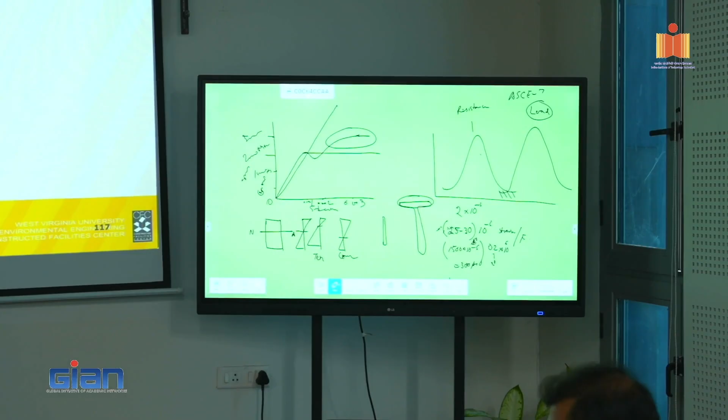Sometimes, I told you, nobody asked me a question and I'm glad you didn't. I said I built a jointless bridge - remember, my McKinleyville bridge? That's going to expand and contract, right? And that's going to crack, and it did crack, for example, due to whatever reasons.

So what we do in the US is, we let a bridge crack, then clean the crack and grout it - high pressure grout, no doubt, not the kind of housing grout you have that peels off, no. And what did you do? You have created an excellent kind of pseudo joint. Yes, sir, you see?

One administrator in the US built all the buildings but didn't put any pavement. So everybody was worried, what's wrong with this guy? You know what he did? He waited two years, watched how the students were walking, what direction, and figured out where the grass was beaten up, and that's where he put the pavement.

So likewise, we are finding a jointless bridge, letting it crack, finding exactly where it is cracking, opening that up a little, cleaning it up, and putting a high strength grout. The grout has a certain ductility to it, therefore it doesn't open up.

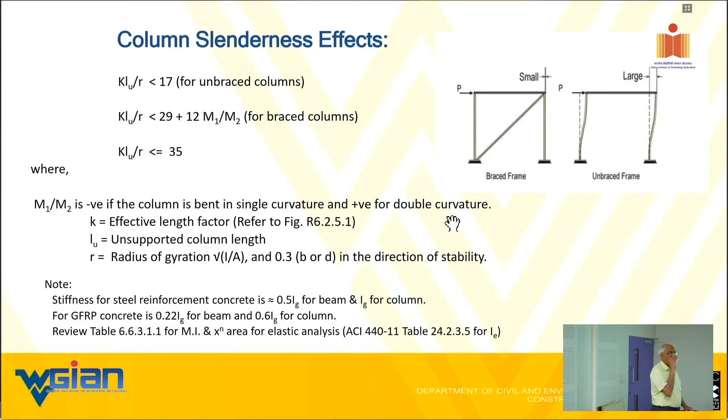Anything else? Currently, we are doing the application. Simultaneously, the analysis is being done too. And I always like to tell people, a code is a dynamic system. It is an evolving system. This is not a perfect system.

We're trying to improve it based on our understanding, based on our experience, based on the failures. As some wag said, you learn a lot more from failures than from successes, because in successes all the failures are buried in. Whereas with a failure, you want to analyze that, and that's why the concrete guys never ever allow you to use any kind of equation in a brash manner without adequate testing.

Because they know you are dealing with a cracked section, not an uncracked section. Now, I can give you a reason, Mr. Sharma - your name is Sharma, you said? I can almost come up with this number. You know that? How? A cracked section with 0.1 inch depth, and you multiply that by 1/3 BD cube plus AD square, you got an answer. See how clever they are? You understand what I said? That's how they came up with it.

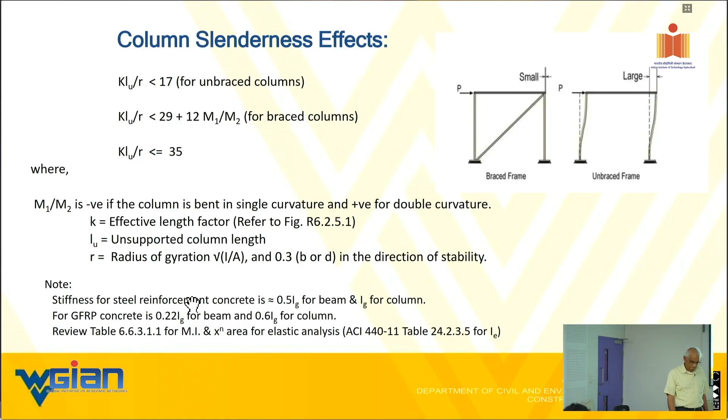Analysis or design, any one of them, always have certain assumptions. Would you mind going to the one slide before? So, okay, these are the assumptions. Again, I'm coming from the US code point of view. So I need to properly explain what is 0.003, what is this, especially this one, and what is this. I'm coming from the US code point of view, so you have to bear with me.

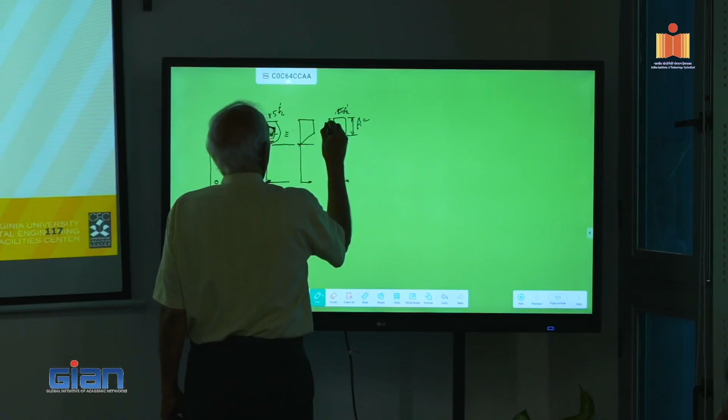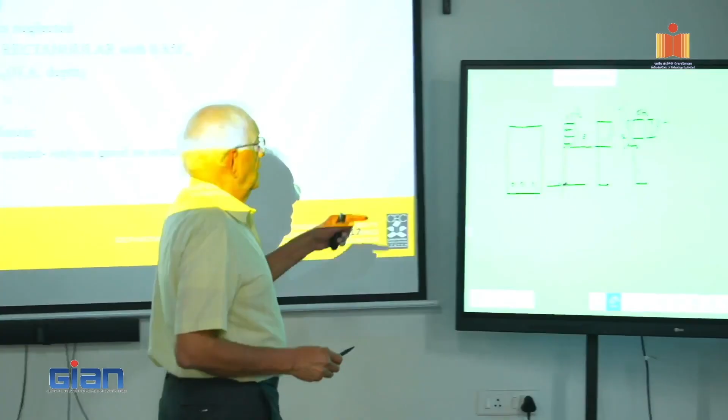Okay, now I'm talking about the US code. There are three different kinds of stress blocks that we use in the US. This is a parabolic stress block, also known as Hognestad's stress block. This is a trapezoidal one, known as Jensen's stress block.

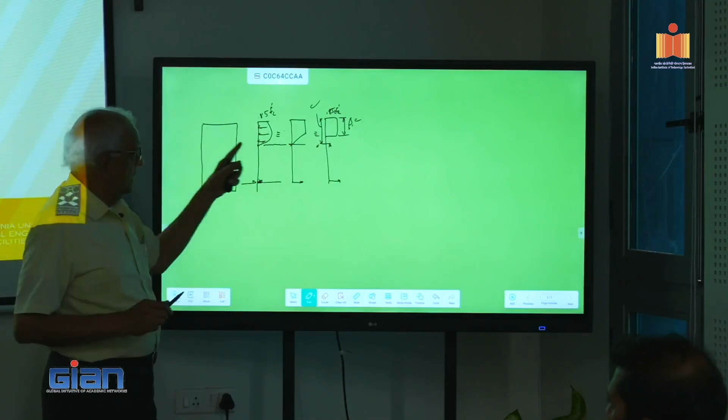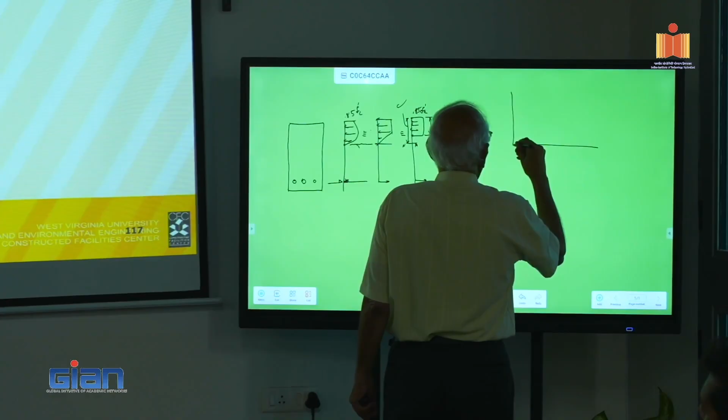This is Whitney's approximate stress block, corresponding to that of Hognestad's stress block. You know how we got this? That is essentially nothing but the stress-strain curve of concrete. So if you look at the stress-strain curve of concrete, that is stress versus strain. So on the strain axis, you flip it, that's what you're going to get.

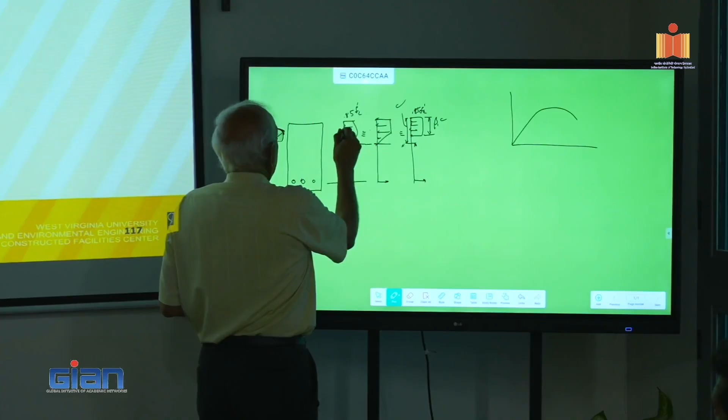Now, that's a very difficult stress block to mathematically handle when you are dealing with it as an equilibrium equation, right? So, of course, the resultant of it is somewhere there. That should be equal to this, right? Otherwise, it's not in equilibrium and all that good stuff. And Jensen came along and since it is too complicated, he did this. And then Whitney said, no, no, no, it's even more complicated, and he did this, which is wonderful, easy to deal with, right?

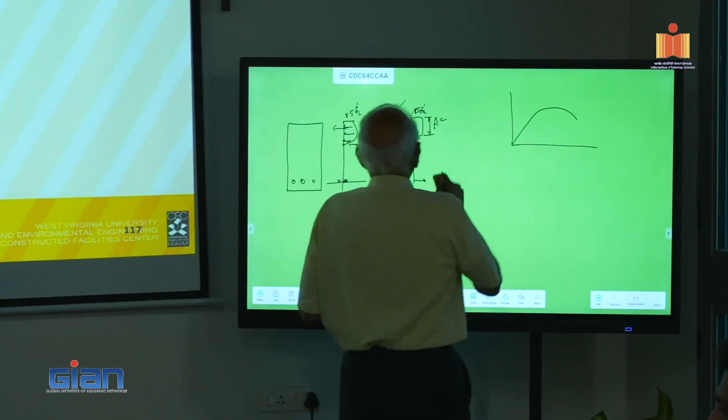So the force from this stress block is what? The force is B times C, where B is the width. We call it A - let's call it A. That is, if you look at the 3-dimensional view, this is the area. And you multiply that with F prime C. That will give you the compression force, which should be equal to As, Fs, or F1.

I'm going to leave it as Fs only because I'm going to make you understand what is a compression failure. I got some questions - I was a bit surprised, there is a misunderstanding about it. Therefore, I'm taking a little bit of time to explain it. Okay, now you understand how this is transmitted in this fashion. This is a simplification of this, and this is a simplification of that. So that is the force part of it.

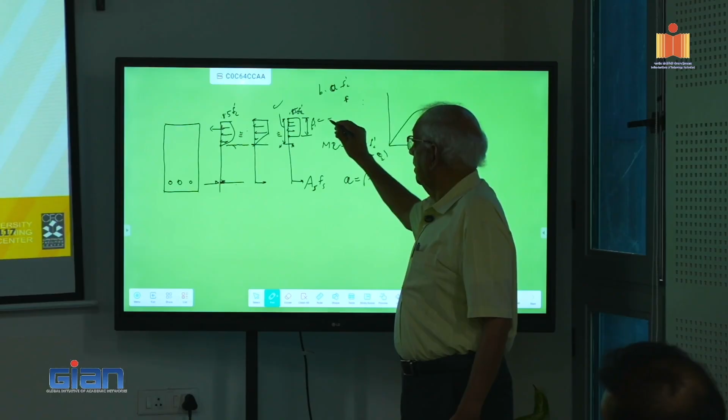What is the moment part of it? Moment resistance is that force times the distance from the neutral axis, which is d minus a over 2. So the a value is beta 1 times c. You see that beta 1c? So what is beta 1c?

This is American code, so I'm not familiar with your code, but they're all about the same - equilibrium cannot be different, right? So what is beta 1c? I'm teaching the American code. Up to 4,000 psi, beta 1 is 0.85. Up to 4,000.

Above 8,000 psi, beta 1 is 0.65. When you go from 4,000 to 5,000 psi, beta 1 is 0.85 for F prime C of 4,000 psi concrete, which is approximately 25 MPa, maybe a bit more, 27 to be exact. Beta 1 is 0.8 when F prime C is 5,000. That is the simplification made by the American code. That number is 0.75 for F prime C of 6,000, 0.7 for 7,000, 0.65 for 8,000, and it stays there or greater.

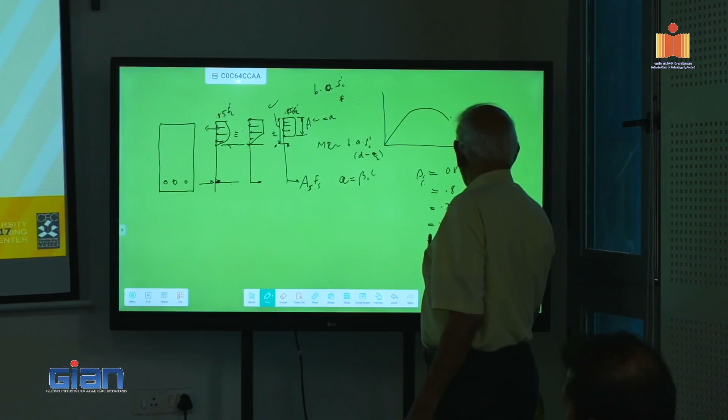So that is the definition of this beta. Again, after testing literally hundreds of cylinders, we deal with cylinder strength, not cube strength. You all deal with cube strength. So please note, I should have emphasized it up front.

So now you know what beta is. It's extremely simple. Your moment resistance is B times A, that is the compression block area, times the corresponding strength, and D minus A over 2. Oh, I goofed up, sorry, I should have added 0.85 here. So that is an approximation, but it works wonderfully well.

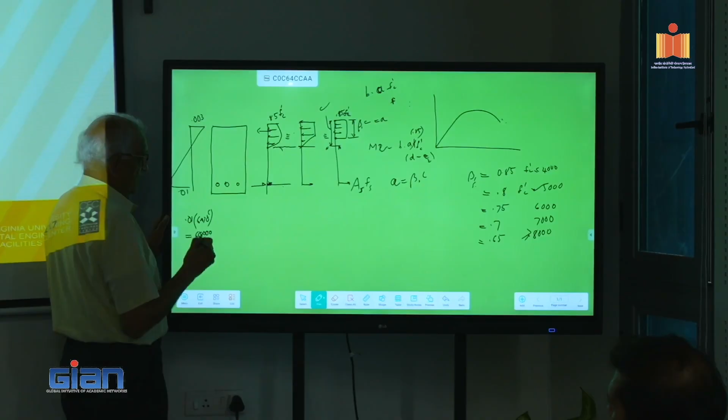That comes from the 60 KSI business. Somebody thought, meaning 0.01 is the strain, and the E value of the composite is approximately 6 times 10 to the power 6. So 0.01 times 6 times 10 to the power 6 is 60,000 psi or 60 KSI. That's where there is no rhyme or rhythm for arriving at that.

In my notes, you will see in the next slide or two, I certainly question this. But I'm not going to go there, my questioning doesn't make any difference, you have to follow the code. Why do I question that?

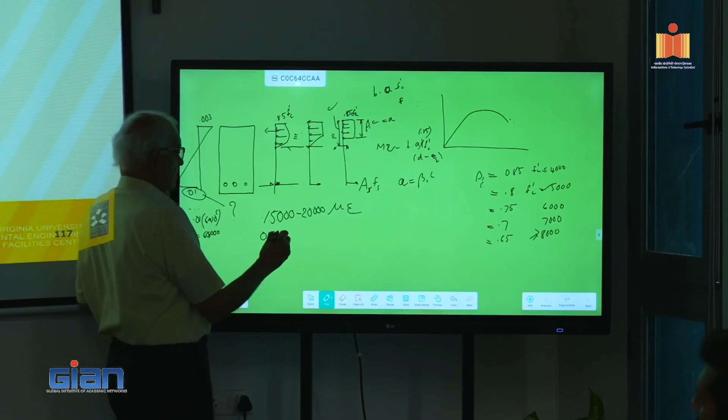Think about it. If you remember, I said typically I tested 500 to 1,000 bars in that range with your vinyl ester type thing. Typically, we are getting about 15,000 to 20,000 micro strains to failure. So if I convert that, multiplying with 10 to the power minus 6, that's what you get, or it's more, I was getting in this range.

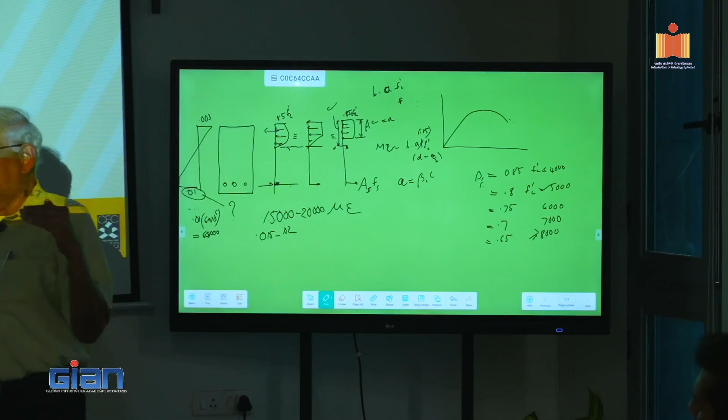So they have reduced it by a factor of 2. Don't ask me why they reduced it. My feeling is, I was not there to understand it, but my feeling is they put it at 0.01 because that corresponds to your 60 KSI steel. I think that's what they did. Somebody was asking me the question, where did you get 0.01? You know, that's what it is.

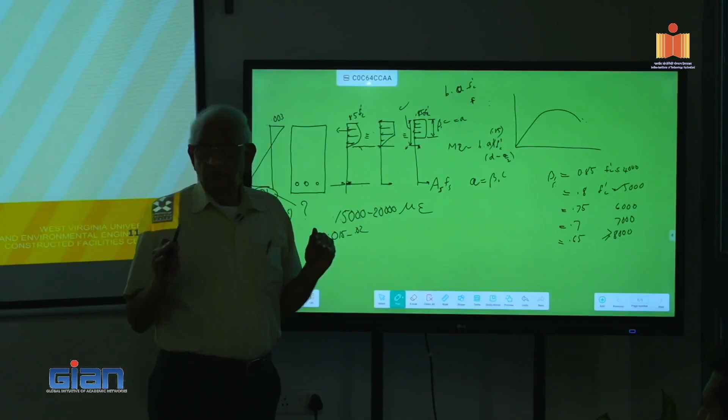Okay, now, if it is a balanced failure, most of you know that we are talking about concrete reaching 0.03 while at the same time FRP at 0.01. That's an imaginary idealistic framework, whereas it may not be true.

If I want concrete to first reach 0.03 or 0.035 - you people use that, the Germans have 0.04 - if you want concrete to reach that number before FRP reaches its number, that implies a compression failure mode under bending loads. We have to be very clear, because somebody asked me a question and I was a bit aghast, oh gee, I didn't explain it right. So in such an event, when will you get that? Only when the neutral axis is below the balanced value. And conversely, if I want a tension failure, it goes up, and you know the rest of the story.

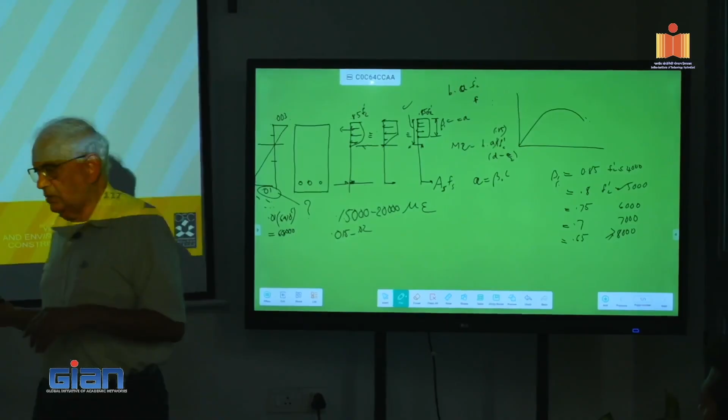Now, why did we pick compression failure mode as a preferable failure mode? We never said you should not use a tension failure mode, nobody said that. Between the two, we prefer a compression failure mode. Why? Because when we look at it, the energy absorbed under compression failure mode for FRP reinforcement is higher than the energy absorbed under tension failure mode. That is the crux of the issue.

In steel, we have a preferential failure mode as tension failure, not compression failure. There was a tremendous resistance to accept compression failure mode with GFRP because of that mindset. Then we have to show here that the energy absorptions and deformability ratios are superior compared to tension failure. It's all a relative statement. It may not be as good as that of steel, but you still have a good amount of warning. Why are we using this? Because we need adequate warning to prevent catastrophic failure.

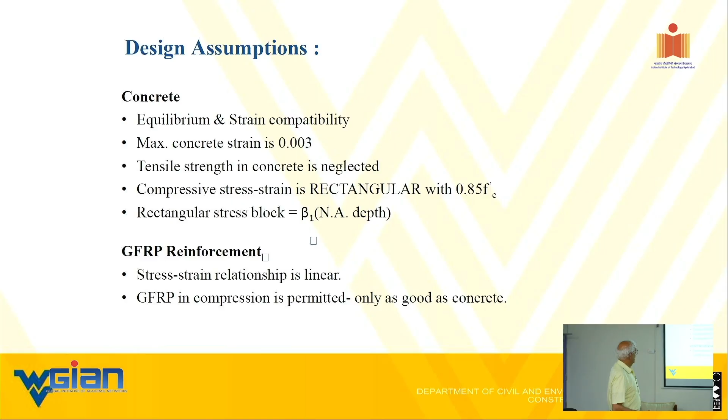Okay, now I will go. Did I skip anything? Okay, no, I didn't skip anything there. So I already gave you this - the compression failure mode. You look at that. What is that? Area times FFU.

That's the lower bound. That is the balanced value. The balance is established based on your compatibility relationship - it doesn't show on that screen. Compatibility relationship - where did you get this thing? That thing comes from here.

So with that, I talked about the beta 1 issue already, and this is the complex curve that is idealized as this, and that is the balanced failure. What did I say? I said the balanced failure definition is 0.01 - I wrote it there, right? Okay, now I further stated here, beta 1 is 0.85 up to 4,000 psi, decreases by 0.05 - I wrote it down there too.

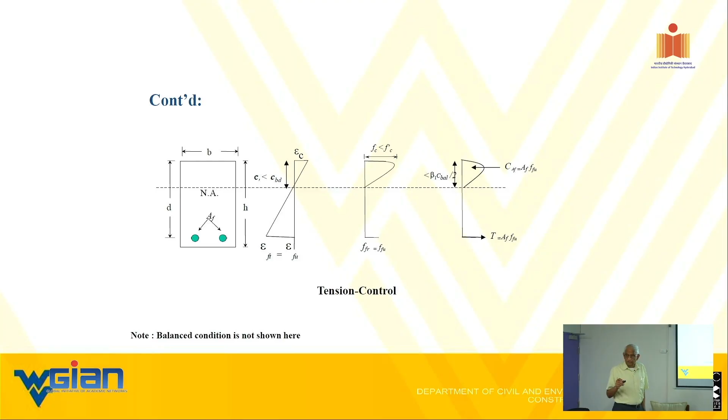All right, now I'm explaining it because our code is slightly different. Like he said, it all washes out to the same thing with a few percentage points this way or that way. That is tension failure. I already told you that the neutral axis is going to be shifting up smaller than the balanced value. That is the tension failure.

What is a dowel action? What is a dowel action, do you know? It is a shear transfer by the composite. They neglect the dowel action, shear transfer, even by steel, forget about the composite. In other words, they do not account for the dowel action. It's a friction.

Actually, it is the shear of dowel bar. Somebody was asking me about the dowel bars. So there's a shear force transfer, and we are not accounting for that kind of thing when it comes to composites. Even in steel, we measured it. Some of the dowel actions increase the strength of the material by about 15%. But we are not accounting for those kinds of things in real mass designs. We may do that for research purposes, but not for design purposes. So first of all, I want you to understand the dowel action, shear transfer.

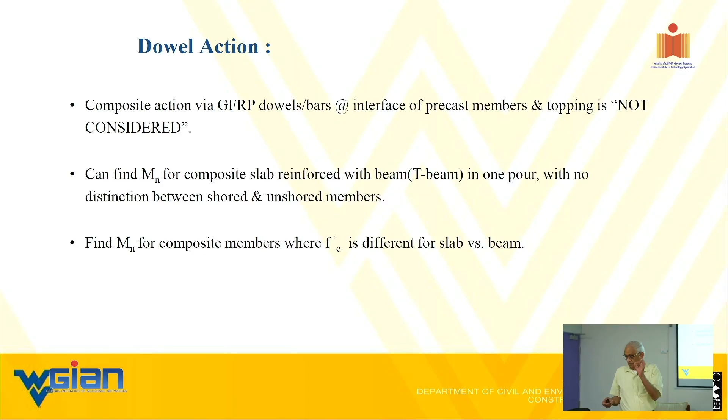Now you can find Mn as a nominal value. What is a nominal value? That is before you multiply with the reduction resistance factors. That's called a norm. If you multiply with a phi factor, that becomes your M sub u.

Axial and combined axial flexural strength. Here, if the axial load that you are applying, what's P sub U? P sub U is from the induced loads, but most importantly, multiplied with appropriate load factors. So you need to understand and clearly differentiate this, or else you can be mixed up.

If P sub U is greater than 0.1 F prime C A G, then stresses in GFRP are limited to 0.01. In other words, that is the combined axial bending effect. If P sub U is less than that, for all purposes, you say it has no bending effect. That's again an approximation. Only after the axial load effects are higher than 10% of the ability of the concrete to take the full capacity load under compression, then only.

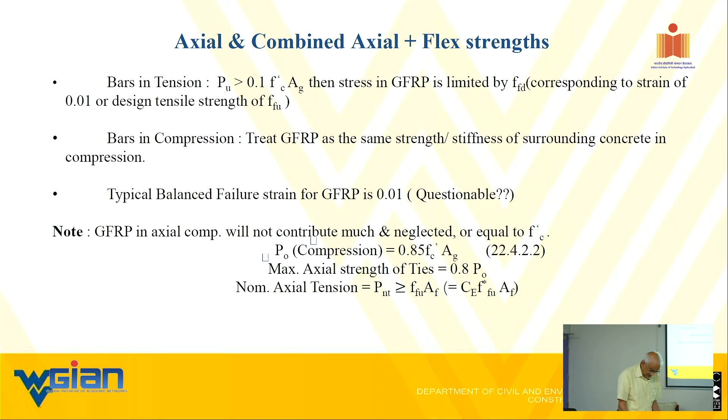Okay, we neglected the dowel action. Now, again, these are all rule based, right? So what is that telling us? The closed loop ties have a clear spacing of 4/3 of the size of the aggregate. Typically we use 3/4 inch aggregate, but that's not the only one. We also use 1 inch aggregate size, maybe 1 1/4 inch, depending on the size of the concrete, a beam or a column. But the message is...

That is one. The second thing is center to center spacing of the ties is 12 times the diameter of the longitudinal bar, or 24 times the diameter of the tie or the stirrup. We use the smallest of the dimensions.

Minimum bar diameter - in the US, we don't have a number 2, meaning a 1/4 inch size bar. We don't have it. I don't know if you have it anymore. So we typically use a 3/8 inch bar. That is 3/8 inches, which is 9 millimeters, right?

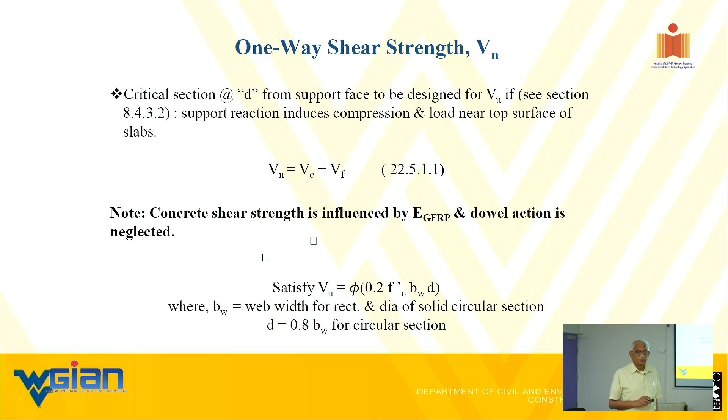Now let's look at the concrete. I don't even know, honestly, me talking, not the code. They have two equations there. They're saying greater than 5 times lambda S KCR square root of F prime C BWD. So BWD is the area, right? Yes, we know that. So 2 times, typically 2.5 times square root of F prime C is what the concrete shear contribution.

But what I didn't quite understand is, we can talk about the lambda S. For a minute, let's assume lambda S is equal to 1 for discussion purpose. So what is the first equation versus second equation? That is 5 times KCR times the rest versus 0.8. That's essentially the difference between the two. Am I right? Yes, okay good.

KCR, I don't know how many of you, do you remember how to get that KCR at all? You don't remember. What is KCR? KCR is what is the depth of the compression block at failure. You know, that is the key. That's what we are talking. And like I told you many times, it is hovering around 0.1, 0.12 in that general range.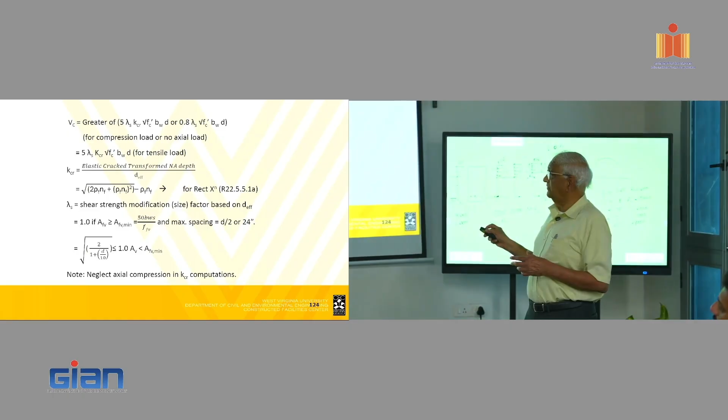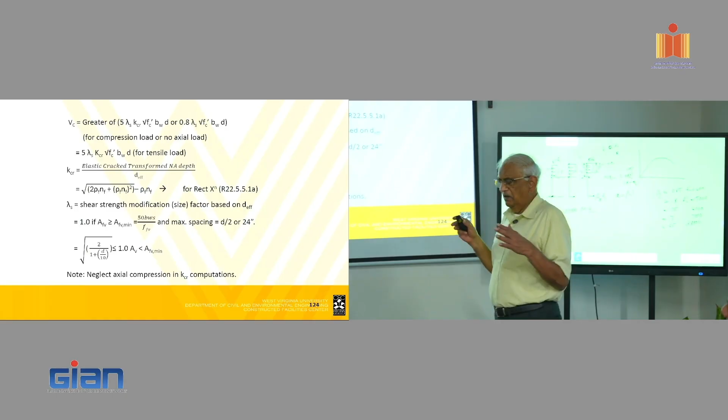So if I really multiply 5 times 0.12, I get 0.6, right? And with all the approximations, why they wanted to sound like a super sophistication with that equation, I have no idea. Number one, I can derive that equation in no time. But number two, this value is so small compared to that value. I don't even know why they have included this term under the square root. I have no idea, but that contribution of this second term is totally negligible.

Shear strength modification size factor. You know what a size factor is? You don't, okay. Timoshenko shear, if you look at it, size factor is a ratio, is a value based on the ratio B over D. If B over D is nearly square, it is about 1/3, nearly square, plus or minus. But if that increases, 1/2, 1/4, it may come down to 0.25, 0.2. That's the kind of a size factor.

But typically, in any design, maybe I should have started with that. When you design or want to design a beam based on steel under bending, where do you start? L over D ratio, L is the span length, D is the depth. Where do you start? The number is around 17, 18, 19. L over D should be 17, 18, in that range, right? In FRP, that number is 12, 13. In that range, somebody say 11, somebody say 13, but give or take, that's what that is.

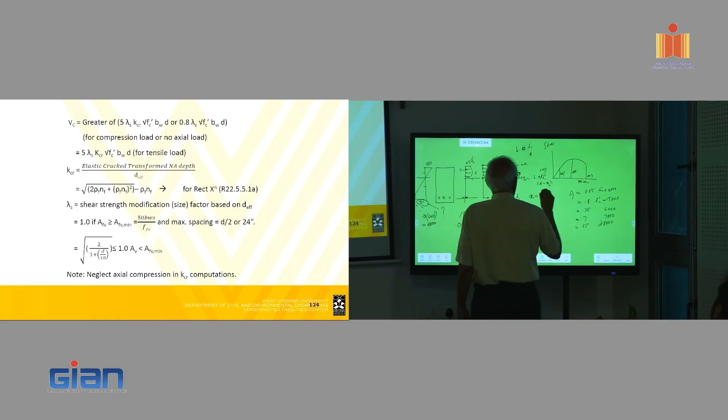And you know what? In this is the stress, right, of concrete cylinder or block. This is strain, right? This number is 0.003, we said that, right? This number, strain is 0.002. This number, 0.001. You know what 0.001 is? Up to that point, which is approximately 45% of F prime C, up to that number, we are saying that the stress versus strain in concrete is linear. That's what that number, that magic number 0.001, that's what we are talking about.

Okay, anyway, all right. So if I use the strain compatibility, if I use the equilibrium equation, if I use the force deformation relation, which is the Hooke's law, if I use all three and make it into one equation, that's what you're going to get. I'll be happy to derive it. Let's not waste time on that. Any rudimentary sophomoric textbook has it. That's what you're going to get.

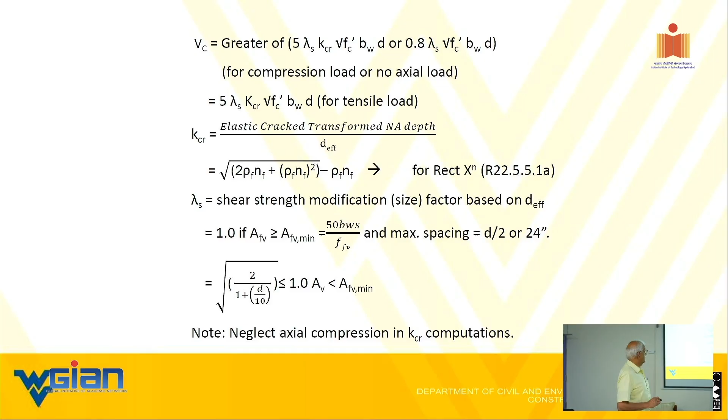One-way shear reinforcement - what is a one-way slab and a two-way slab? The aspect ratio is less than 2 to higher than 0.5 between them. It's a plate action, the del 4 equations and so on. Some people use 2.2, 2.4 for the one-way slab. Above that is a one-way slab, below 2.2, 2.5 is a two-way slab.

So what's the difference between the one-way slab and two-way slab? The two-way slab is stiffer than the one-way slab - that's essentially what it is. The two-way slab has two-way bending. The one-way slab is like a cylindrical bending, which we call one-way bending. We only put reinforcement in the other direction as a rule, based on some kind of As minimum for temperature and shrinkage. All right, that's the difference.

So we are talking here about a one-way slab, not a two-way slab. Yeah, shear - here, if you look at it, talking about slabs...

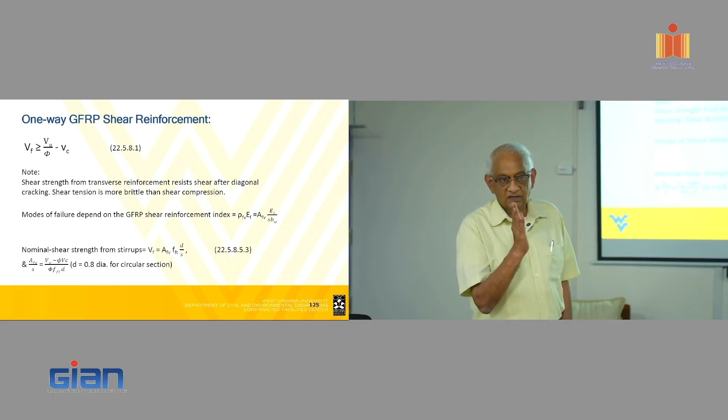What that is - of a stirrup? That is the area of the stirrup, that is the strength of the stirrup, which essentially gives you how many stirrups you have in a given depth, because the shear crack is assumed to be 45 degrees. That's how you get that - the number of stirrups, d over s, is the number of stirrups that are cut by a 45-degree angle of the shear crack.

Okay, so from all that you are going to get, by substituting all this here, the equation you're going to get, and I can define all this. So what am I doing here? What is my spacing, right? So I'm going to pick a number 3 diameter bar or a 4 diameter bar, therefore I know the value of the area of that bar, right?

So here is the shear force including the load factors. Here is shear resisted by concrete including the resistance reduction factor, and this is what that amounts to. So that will give you the spacing of the stirrups. From this equation, I know everything except this, so I find the spacing. Okay.

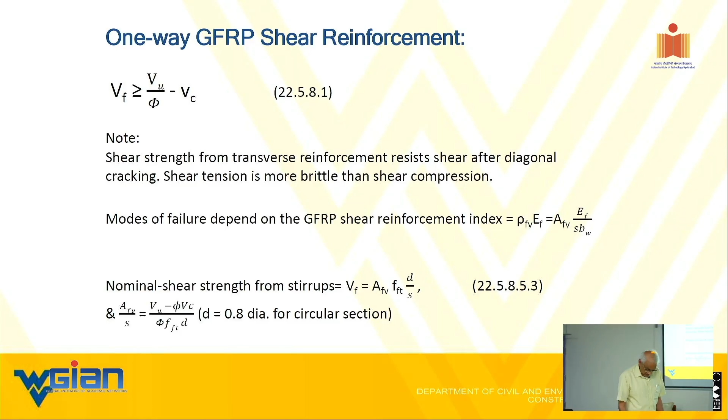It is the section in which the column is trying to punch through, at a distance d by 2, or d, from the face of the column all around. That is called a critical section.

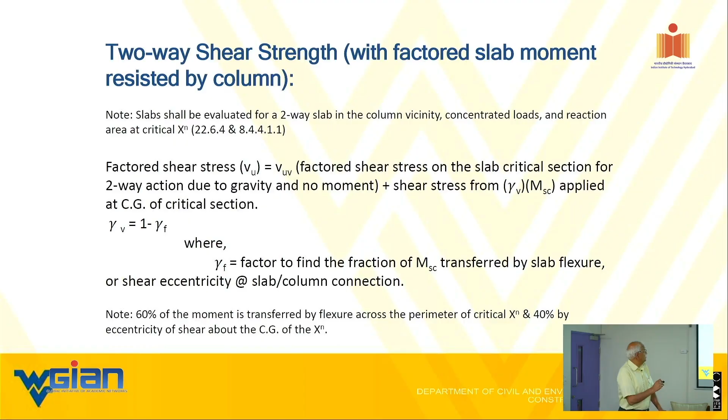This is the equation. I provided the section numbers but not the equation numbers from the code; if you open the code, you will find the equation numbers. These equations are essentially the same as those in the ACI 318 code. And please don't forget, the mechanics part didn't change, only the materials part changed, so that is one thing you need to keep track of.

We're back to our same philosophy: phi is the reduction factor for the material, and S is the strength. We in the US call stress as strength, don't ask me why, I don't know where that word came from, but what it means is essentially the stress.

U is coming from the factored load combinations, so phi times Mn is like Mu, where Mu is the load-combination-based moment capacity. You will understand all this when I run an example very quickly.

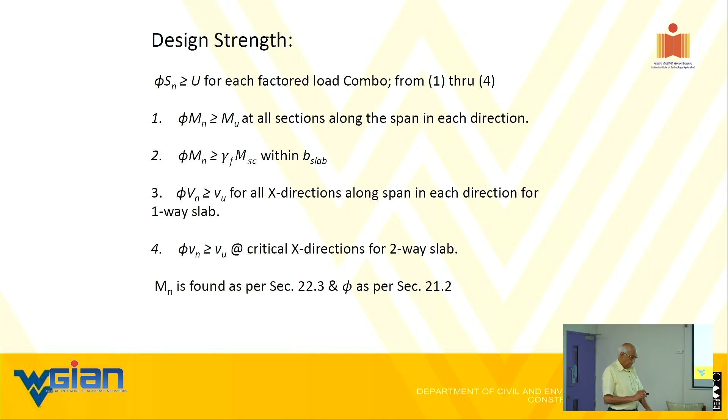Slab design shear near columns, concentrated loads — remember I told you the plane sections do not remain plane, and they gave you guidance for where you have an opening, or a drop panel, a discontinuous function.

That is where all these section numbers I gave you come in. As I said, chapter 8 talks in generalities, while the specifics are in these other chapters. Please look: it's permitted if the analysis shows strength and service limit states are satisfied. This is quite a task, you need a lot of patience to crank through these numbers.

The reinforcement limits require a minimum amount of reinforcement, not only from the standpoint of temperature and shrinkage, but also because you do not want reinforcement less than the needed amount when the first crack occurs. So minimum reinforcement is always tied to the cracking moment, Mcr; otherwise, if a crack happens with less than the minimum required, it leads to catastrophic, collapse-type failure.

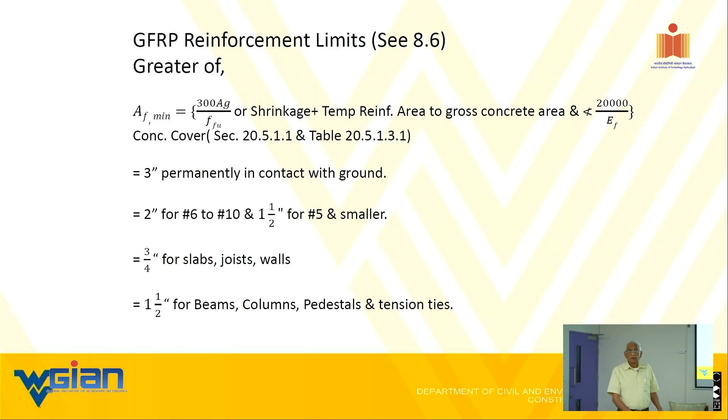So 3 inches for cases with permanent contact like foundations, 2 inches for number 6 to number 10, and 1.5 inch for number 5 and smaller. These are minimum values: 3/4 inch for slabs and joists, 1.5 inch for beams and columns. Again, they call for a 2-inch clear cover under fire conditions. So keep that in mind.

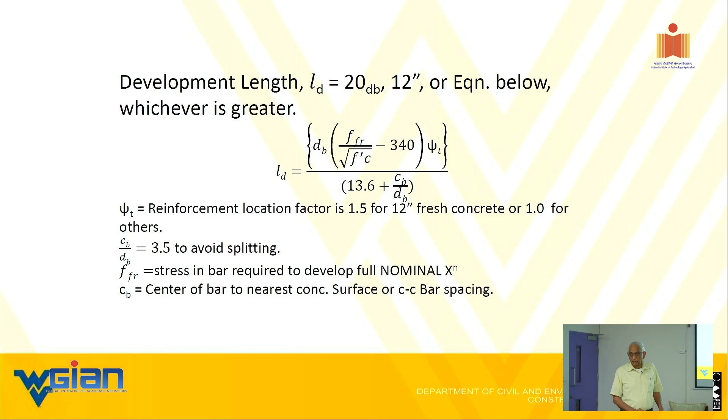Development length is very similar to steel, slightly modified but very, very close. The reinforcement location factor is 1.5. That's psi, the Greek letter psi, 12 inch fresh concrete, or 1 for other concretes. CB over DB, whereas CB is the center of the bar to the nearest concrete surface, or center to center bar spacing, that is 3.5 to avoid splitting, or else you're going to get cracking of the concrete cover.

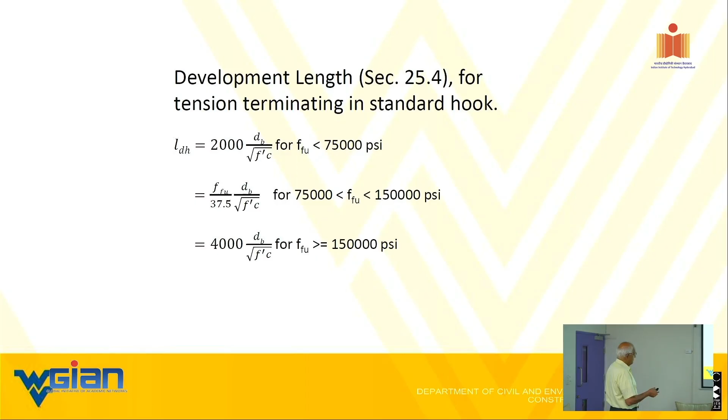You have a question, sir? Sir, I wanted to ask you -- what is the reduction factor for compression failure? For compression failure, what is the reduction factor? 0.65. Yeah, it's written right there. Oh, I thought I did somewhere. Somewhere it is there, 0.65. That's on the slide only, therefore.

Oh yeah, there. Please look.

Anything dealing with compression type failure is 0.65. Anything dealing with tension type failure is 0.55. But in the axial force calculation, you have shown 0.85 into FC prime. That is pure axial, pure axial. Wait, that's one aspect. The other aspect is, I did show...

I can get a bending moment from this equilibrium diagram. Based on this approach, from here I know the balanced value, right? So if the depth of the compression block is below the balanced value, then I have to multiply all this with the phi factor.

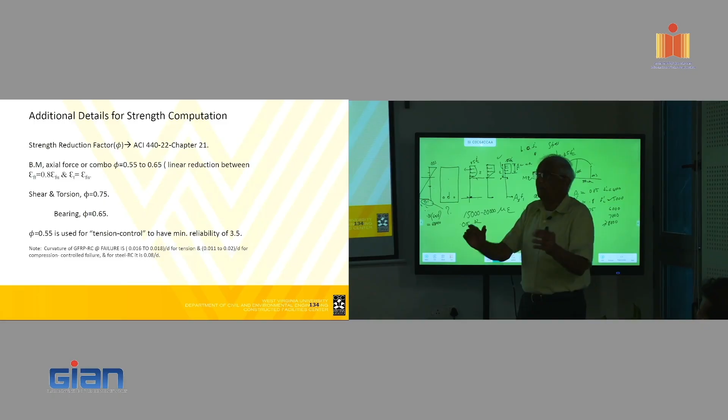First I have to establish, is it a tension failure or compression failure? If it is a compression failure, I'll find the bending moment Mn. Okay, I better make this very, very clear. So from here, I'm going to get, where is this?

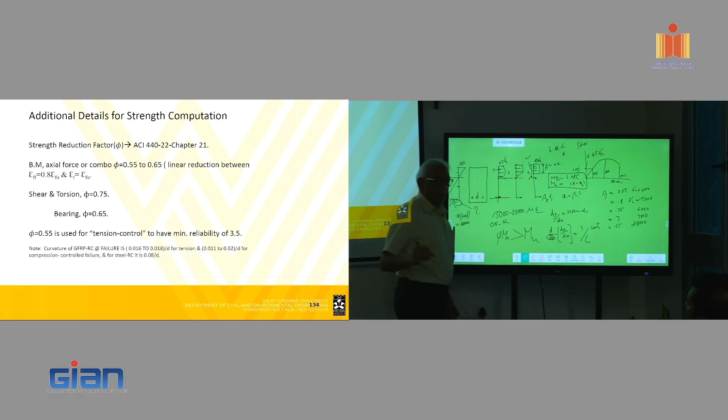I thought here. This is what we call Mn, that's what we call it. That should be multiplied with phi. Exactly, this should be multiplied with phi, and this should be higher than Mu, where Mu is the one with the load factors included.

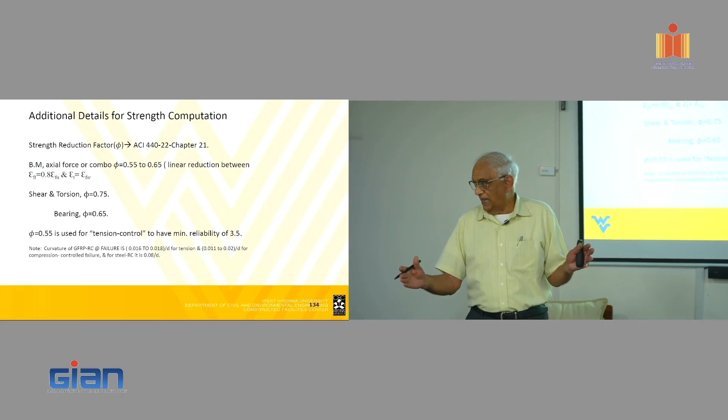I'll repeat all this in a design example. I'm just doing this like the code did. First, so many chapters are theory, or whatever you call it. Then the other chapters are the nitty-gritty. So this is very, very critical. This approach is going to be...

Actually sir, in our IS code, we do take the factor of safety in material and load, but whatever moment we calculate, we take it back as a strength. So here in ACI code, we put the factor of safety in the nominal moment capacity. That's the difference, I think that's why.

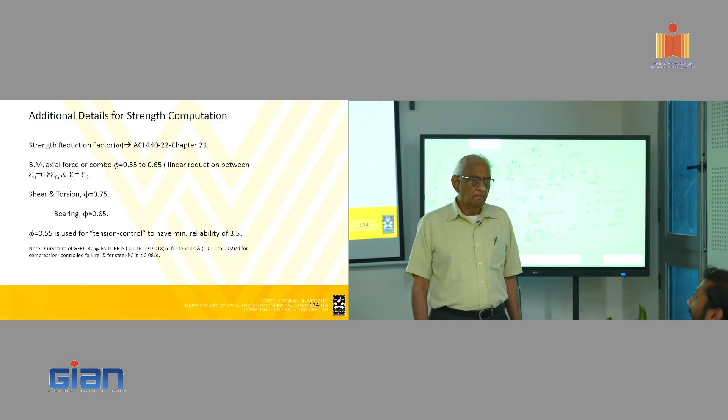Before calculations, we multiply with the partial safety factor at the material level, then we calculate moment and use that. But in ACI and such, we use that factor of safety after calculating the moment. Correct, so I hope I'm not confusing you. No, I mean, yeah, I know. But it amounts to the same thing.

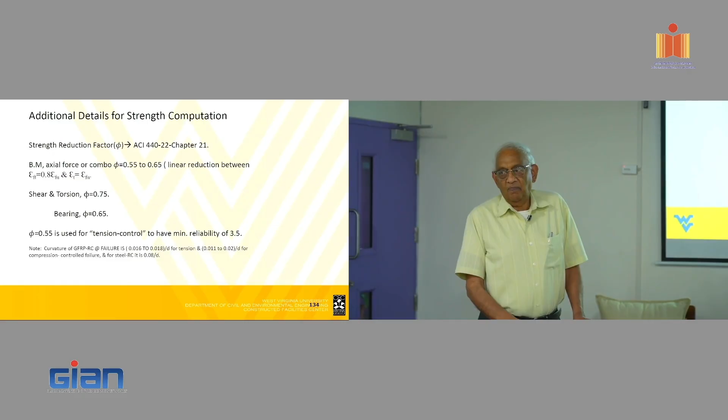That's the point. So like when you do calculation of development length, we need the diameter of the bar. That diameter of bar, there are two diameters: one is provided by the manufacturer and one is the actual one, calculated by the test. Consider the actual diameter—please use whatever the manufacturer is suggesting as the area. They are supposed to give you the actual area as well as your FFU type thing.

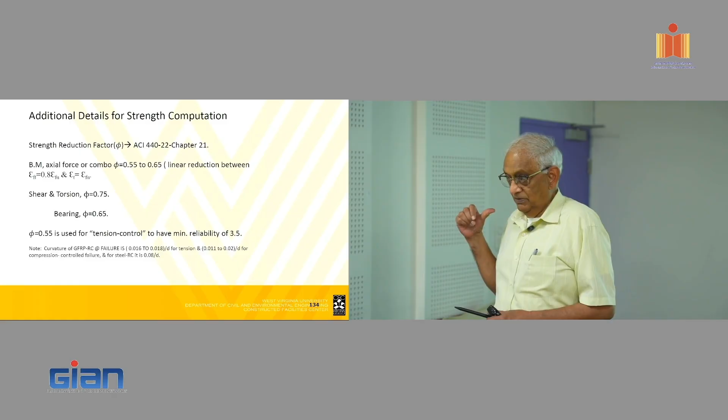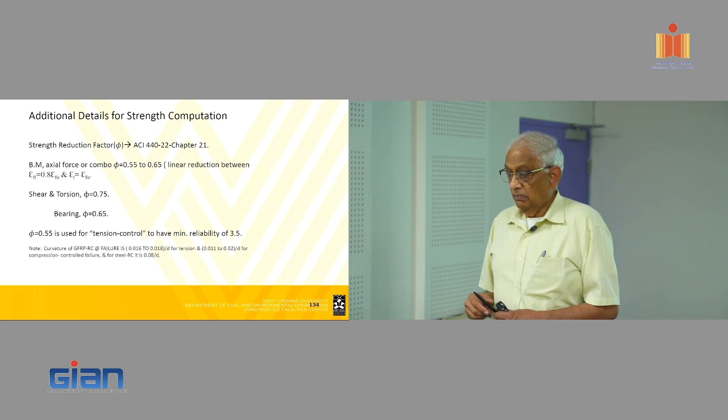You see, as a designer you are not responsible for it. But if something goes wrong, the manufacturer is going to be sued, because as long as you are using what he is giving you, you're okay. I mean, we don't want anybody to have a problem, anybody to have a failed structure. That's not the point. The point is, make sure they have responsibility to provide you with accurate stress values, design stress values, not the average values.

Remember the three different values we are talking about, right? So, and also corresponding area values. In ACI code, if I remember right, we are asking the manufacturer to tell the load that a number 3 bar carries, number 5 bar carries, number 8 bar. We're asking them to tell so that people don't get confused in terms of this so-called size effect. You see what I mean? Because of this shear lag effect.

People think like in steel everything is the same. By the way, I suppose you all know even steel has a shear lag problem, except that shear lag is maybe 1 or 2 or 3%, not like 30 or 40 or 100% in FRP. But that is at a higher diameter. You see, in a microscopic sense, even at a lower diameter you have it, but you don't find it as important, you don't find the variation to be very high. That is why when you test the higher diameter, you find that cup and cone type of separation failure. You see what I mean? That's more pronounced at the higher diameters, right? Not so much at the lower.

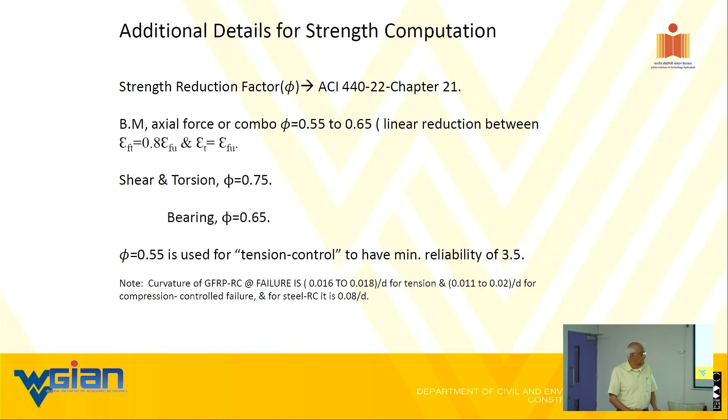0.011, I don't know where we got that 0.02, I'm not sure, but anyway, keep that in mind for compression, and that is very similar to that of steel. Very close, very close. I don't know where that—I need to go back and check 0.02. All right.

So we discussed the issue about the beta 1 factor, and I already told you how it varies. Do you have a rectangular stress block concept here too, or not? We have a rectangular with a parabola combination, so you have to have much more complicated mathematics, I see.

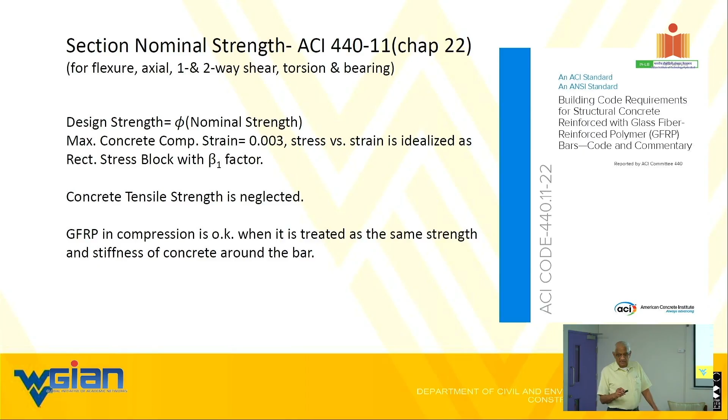So that beta factor is what we talked about. Again, this is the third time I'm writing here: it is saying in compression, GFRP is okay when it is treated as the same as the strength and stiffness of the concrete. Tensile strength in concrete is neglected. This is a duplication of what we covered. All we are discussing is summarized here.

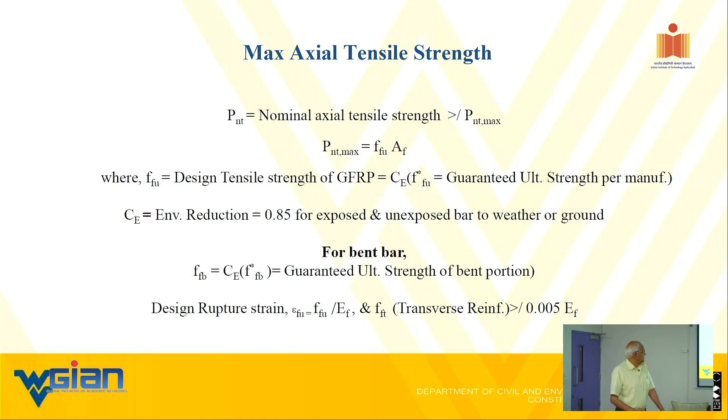Max axial tensile strength—the nominal axial strength—should be greater than or equal to PNT max. That PNT max equation is given there. And for the bent bars, it's a similar kind of scenario as we discussed. So here, one-way shear, I have explained that already to you.

Again this is a repetition, but maybe I didn't explain one important thing: we do not want to take f prime c greater than 100, square root of f prime c. In other words, f prime c is limited to 10,000. Therefore, this code is restricted up to 10,000, but we say 8,000—we are not sure what happens for high strength concrete.

So in the formula, there's a rho f—is it a percentage? Yes, rho sub f is equal to the area of GFRP divided by BD, where D is the effective depth, not the full depth. So indirectly we are trying to see the contribution of the fiber bar in calculating VC. That is nothing but a kind of dowel action.

If you're trying to tell me that the balanced ratio of a steel-reinforced system is such that I have 0.003 for concrete strain to be balanced with 60 KSI divided by EY, which is 0.002 - if that's the premise, using that same 60 KSI divided by E of FRP, which is 6 million, gives you 0.01. That's where it came from. I'm not saying I necessarily agree with that, but that's where it came from. If given a choice, I would have used a slightly higher value than that.

If we're testing a concrete beam under 2-point load, and if it's a compression failure, is it crushing of concrete at the compression side or a flexural crack at the bottom? Definitely you get flexural crack at the bottom, but there's also compression crushing failure at the top in the compression zone - but the GFRP does not exceed a strain of 10,000 microstrain. That's the point. If GFRP exceeds 10,000, then I've defeated the purpose of my computation here. So it cracks, the crack grows, there's no doubt, but the strain in the GFRP does not exceed 10,000.

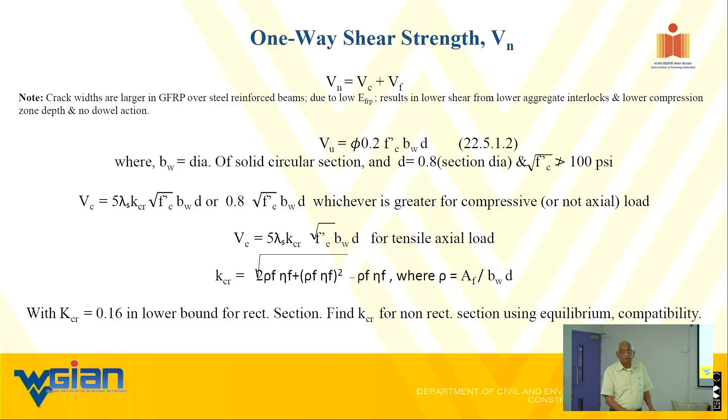Somebody has a question? Okay, not until the numericals and calculations. Okay.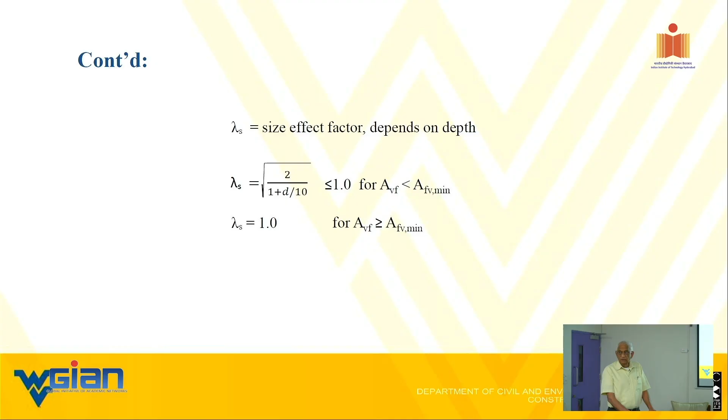Size effect, we talked about it. Again, it's a D over 10 type thing. Typically, we don't want to go more than 20, 24 inches in total depth, which means the effective depth is about 22 inches for a 24-inch type thing. So you're talking about a factor of 0.82 due to the size effect, okay? Same equation, but now I gave you the equation number.

Now we can go to the shear, two-way shear. It's 3:30 already, they want me to stop. Signal time is 4. What I meant is Q&A session. Now it is 3:38 on my phone. Any questions from outside, inside?

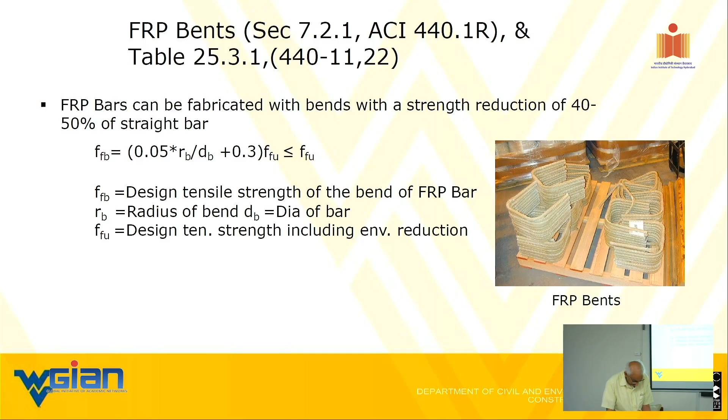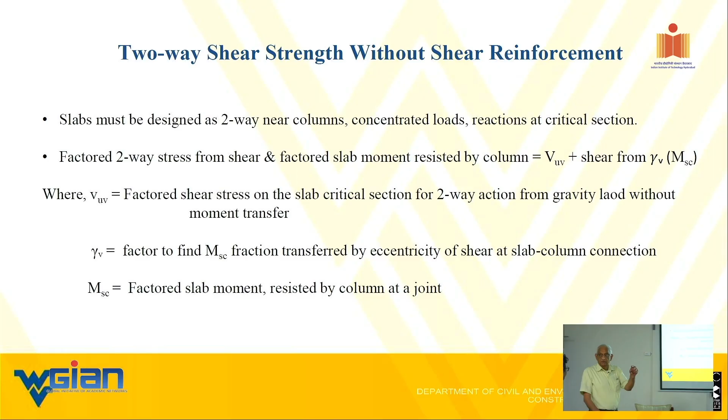We won't do all of them. Do you remember the slide number? 145. This one, no not that one. They're asking, tomorrow they want me to start with the design examples. It's about 200, somewhere around 200. Okay, there we go, go back. There we go, 198. So we will run at least, I have 14 or 15 design examples, we'll run at least 3 or 4 or 5.

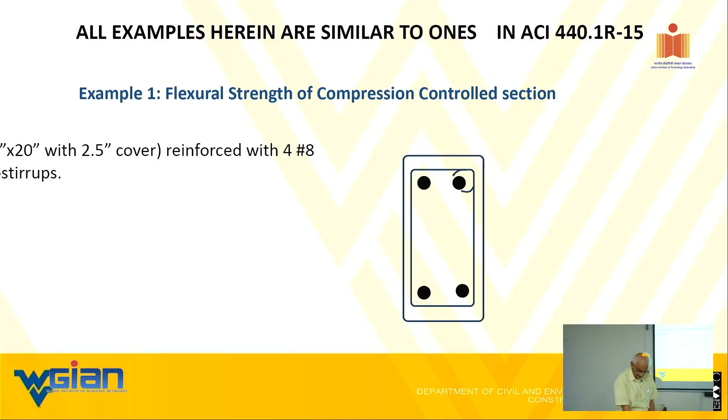Therefore, you understand the terminology, keep that in mind, keep track of what is MN, what is MU, what is phi, what is the load combination, all that, it's all written there. So we'll run about 4 or 5 examples tomorrow, then we can go back. If you please go to ACI 440.1R-15. Anything else? Otherwise, I understand the frustration.